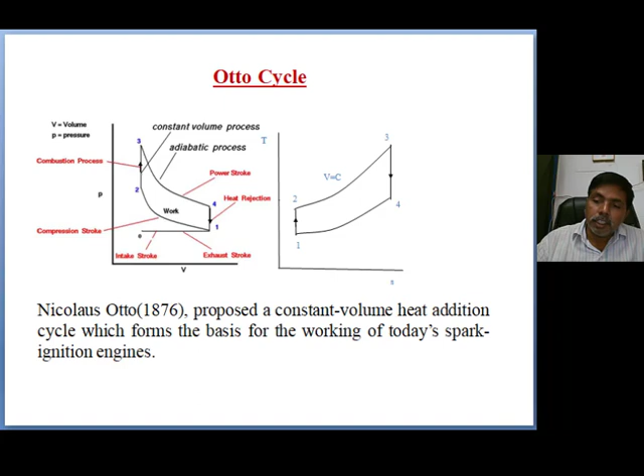Then this one is rectified by Diesel, a scientist. He proposed that instead of air fuel suction inside the cylinder, first we will suck intake the air inside the cylinder, then we will do the compression. Whatever ratio is required, you can do compression.

Why? Because fuel is not available, and at constant pressure process we will inject the fuel. This means in the cycle, what we call, we will add the heat. So here fuel and air we are compressing separately. In Otto cycle, air fuel mixture is entering inside the cylinder and we are doing compression together.

Due to the self-ignition temperature of the fuel constraint, we can't increase compression ratio beyond 8, 9, maximum 10 in Otto cycle. But if we separate fuel and air, compressing separately, then we can achieve more compression ratio.

And in this diesel cycle, heat addition takes place by constant pressure process, not volume process. The basic difference between Otto cycle and diesel cycle: first, in diesel cycle only air intakes to the cylinder, later we spray the fuel. Second, here heat addition is by constant pressure process, not constant volume process.

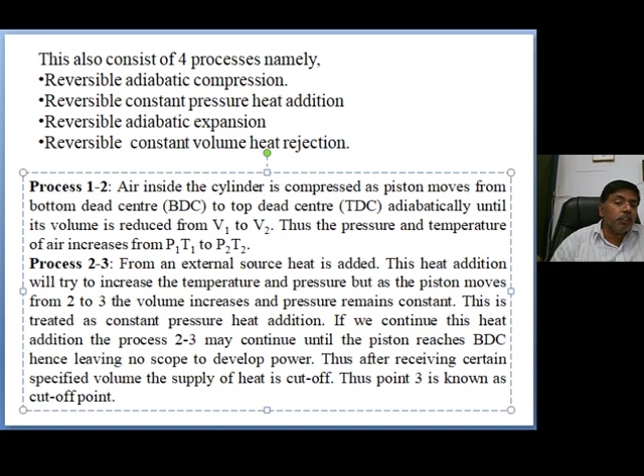Process 1 to 2, what is it taking? Air inside the cylinder is compressed as the piston moves from bottom dead center to top dead center adiabatically until it reaches volume 1 to volume 2. Then process 2, from an external source we are adding heat. This heat addition will try to increase the temperature and pressure, but the piston moves from 2 to 3. By the heat addition, pressure and temperature will increase, but here what we are doing is keeping pressure constant, so we are changing the volume. That's why pressure remains constant.

If we continue this heat addition 2 to 3 until it reaches BDC, it will not produce any power. So after reaching a certain specific volume, we will cut off the heat supply. That point is called the cutoff point. That ratio is the cutoff ratio, meaning volume after heat addition by volume before heat addition. It is greater than 1.

Next process, 3 to 4. What is the process? The air which has gained energy is expanded adiabatically to BDC, and it will develop power. 4 to 1, again same process: the cylinder is made to come in contact with a sink, causing rejection of heat instantaneously till the air reaches its initial state and completes the cycle.

So the explanation, whatever explanation I gave, I have provided in written form. It may be useful for you. I think it may be useful.

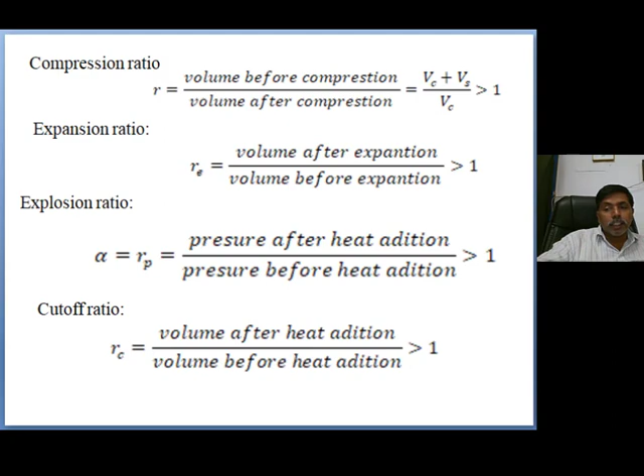What is this ratio? In the class starting itself I mentioned volume after heat addition by volume before heat addition is a cutoff ratio, so we write RC. So T3 equals RC into T2. T2 already we wrote, T2 equals T1 into R power gamma minus 1. You substitute that: RC into T1 into R power gamma minus 1. So T3 also we wrote in T1 form.

Next, T4, process 3 to 4. T4 by T3 equals, in adiabatic process, V3 by V4 whole power gamma minus 1. For simplification, this is the expansion ratio. I want to simplify this: V3 by V4, divided and multiplied by V2. Then we will get two ratios, V3 by V2 and V2 by V4.

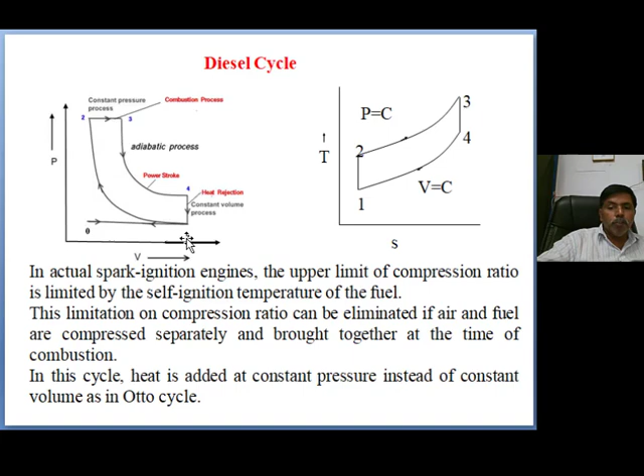Here V4 equals V1. Why? Because it is constant volume heat rejection, so V4 equals V1. In the constant volume heat rejection, V4 always equals V1. So V2 by V1, V2 by V1 means V1 by V2 is... I'm sorry, not gamma, V1 by V2 equals R, the compression ratio.

V2 by V1 is 1 by R. V3 by V2, volume after heat addition by volume before heat addition, is the cutoff ratio. So cutoff ratio divided by compression ratio, whole power gamma minus 1, gives T4 by T3. Here V4 equals V1.

Then T4 equals T3 into RC, cutoff ratio divided by compression ratio, whole power gamma minus 1. Then you substitute the T3 value: T1 into R power gamma minus 1 into RC, cutoff ratio into RC cutoff ratio divided by compression ratio, whole power gamma minus 1.

So R power gamma minus 1 divided by R power gamma minus 1, both will cancel. RC power 1 and RC power gamma minus 1, then minus 1 and plus 1 will cancel. Finally the equation you get is T1 into RC power gamma, so cutoff ratio power gamma. So T4 also we converted into T1 form.

So what we did is write all temperatures in T1 form for simplification of the equation. Next we substitute: 1 minus 1 by gamma into T1 into RC power gamma minus T1, divided by T1 into R power gamma minus 1 RC minus T1 into R power gamma minus 1. Here T1 in numerator and denominator we can cancel. Then the final equation we get is 1 minus 1 by gamma into RC power gamma minus 1, divided by R power gamma minus 1 into RC minus R power gamma minus 1.

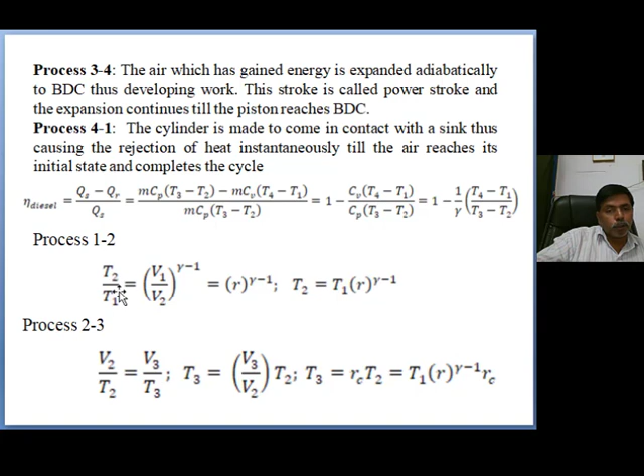Here in the temperatures, we converted and brought everything into a single temperature form by using process relations — adiabatic process and constant pressure process. Then we substituted, and finally derived the equation for maximum efficiency of an air standard diesel cycle: 1 minus 1 by R power gamma minus 1, into RC power gamma minus 1, divided by gamma into RC minus 1. So efficiency of diesel cycle depends upon the compression ratio and cutoff ratio.

What is cutoff ratio? It relates to heat addition — volume after heat addition by volume before heat addition. This is an important driving force for the diesel engine. For achievement of maximum work output, an optimum cutoff ratio is required. Determination of cutoff ratio is the first design parameter for the diesel cycle.

Okay, now we will solve some problems.

So it is clear now — I think the difference between Carnot, Otto and diesel cycle is somewhat clear. Carnot cycle: heat addition and heat rejection are isothermal processes. Otto cycle: heat addition and heat rejection are constant volume processes. Diesel cycle: heat addition is a constant pressure process, heat rejection is a constant volume process.

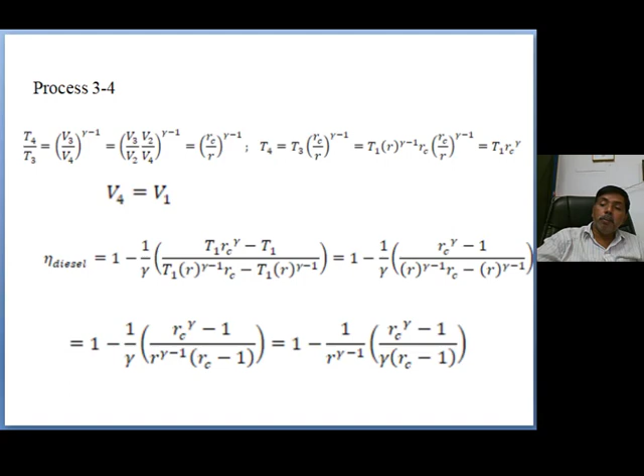Okay, so we will solve some problems, and then we will get a good idea about these efficiencies. I think we will solve 4 or 5 models. The first model...

A diesel engine works on the diesel cycle with a compression ratio of 15 and cutoff ratio of 1.75. So in this problem, they give the compression ratio and the cutoff ratio, and ask to calculate the air standard efficiency. Gamma 1.4, they also give gamma.

So the problem is clear, a direct question. Only one thing you have to recall is the maximum efficiency equation, that's all. The equation is 1 minus 1 by R power gamma minus 1, into RC cutoff ratio power gamma minus 1, divided by gamma into RC minus 1.

Simple. So first write down the given data. What is compression ratio? Next, what is cutoff ratio?

Compression ratio is 15. In Otto cycle problems, compression ratio max varies 5 to 7. But in diesel cycle, first problem it is 15, meaning double the compression ratio. That's why diesel cycle gets more compression ratio, meaning more power output we can achieve. That's why all transport vehicles and hill station vehicles majorly use diesel cycle.

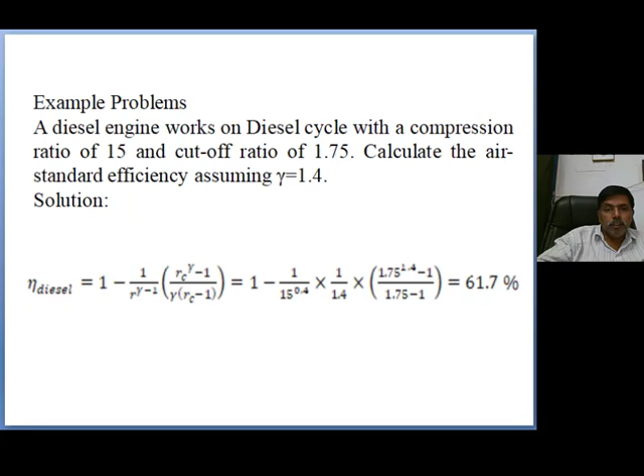Next problem. Here, a diesel engine is working with a compression ratio of 15. Compression ratio is given, same as old problem. Here they are not providing cutoff ratio, instead they provided expansion ratio. What is expansion ratio? This is 3 to 4.

After heat addition, whatever expansion is taking place, the piston moves from TDC to BDC, top dead center to bottom dead center, but already the piston has moved some distance, so 3 to 4. This is called expansion ratio.

In this problem they gave compression ratio and expansion ratio. Expansion ratio is 10. Calculate the air standard efficiency. Assume gamma equal to 1.4. Solve this problem.

I think we will get a clear idea. The efficiency equation is the same, it's not changing. But first you want to determine that in diesel cycle efficiency contains compression ratio, cutoff ratio, specific heat. Specific heat ratio is already given as 1.4. Even if not provided, it is 1.4, because these are air standard cycles.

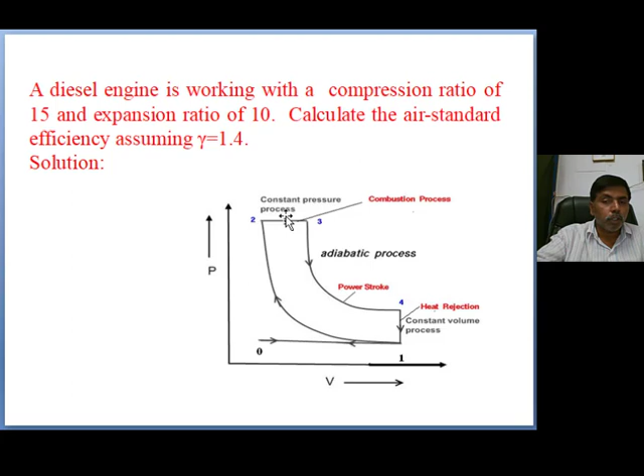You see, compression ratio equal to cutoff ratio into expansion ratio. Compression ratio is always higher than the cutoff ratio and expansion ratio individually. Now I want to determine cutoff ratio: RC equal to R by expansion ratio. 15 by 10, we got 1.5.

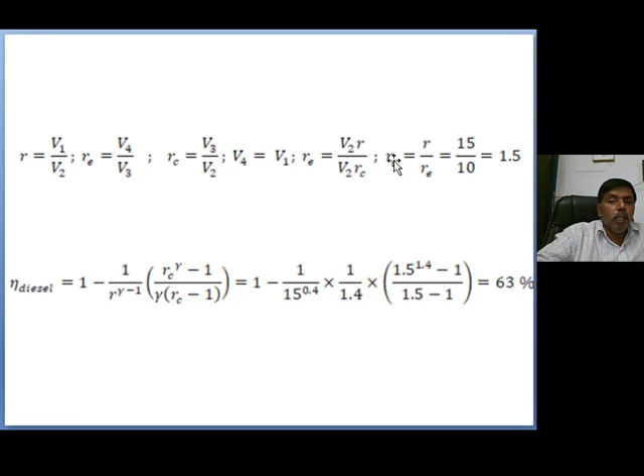By solving this problem, we got one shortcut for competition examinations, especially GATE. Wherever expansion ratio is given, we can determine the compression ratio, or if cutoff ratio and expansion ratio are given, we can determine the compression ratio. Compression ratio equals cutoff ratio into expansion ratio. Then the efficiency of diesel cycle equals 1 minus 1 by R power gamma minus 1, into RC power gamma minus 1, divided by gamma into RC minus 1. Substituting, you will get the standard efficiency of the cycle.

So by solving this problem, we got one logic for competition examinations: compression ratio equals cutoff ratio into expansion ratio. Okay, very good. Next, we'll solve the next problem.

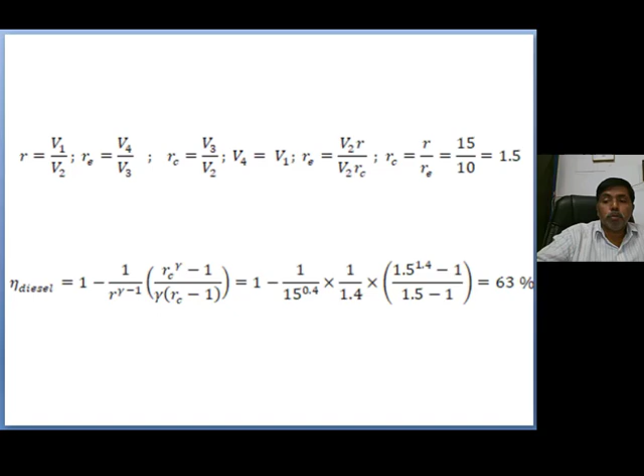Yes, we'll solve the next problem. Move to the next problem. Here, a diesel engine has a compression ratio of 20.

Diesel engine has a compression ratio of 20, and cutoff takes place — they haven't given the ratio directly, but a logic for the cutoff ratio. Cutoff takes place at 5% of stroke. Find the air standard efficiency, assuming gamma equals 1.4. See the problem, third model.

Here, a diesel engine has a compression ratio of 20, and cutoff takes place at 5% of the stroke. What is stroke? 5% of the stroke — cutoff takes place at 5% of stroke. Then find the air standard efficiency. This is one of the important questions in competition examinations.

How are we calculating it? First I will show the theoretical method, and later I will give a shortcut too. In air standard cycles, these are the types of problems you'll get in competition examinations — 2 mark questions. So first, every time, draw the schematic diagram.

That is first principle. Next, write down the given data. Here, compression ratio is 20. What is compression ratio? R, compression ratio, R equals V1 by V2 — volume before compression by volume after compression — equals 20. Then V1 equals 20 V2. That's all, so V1 equals 20 V2.

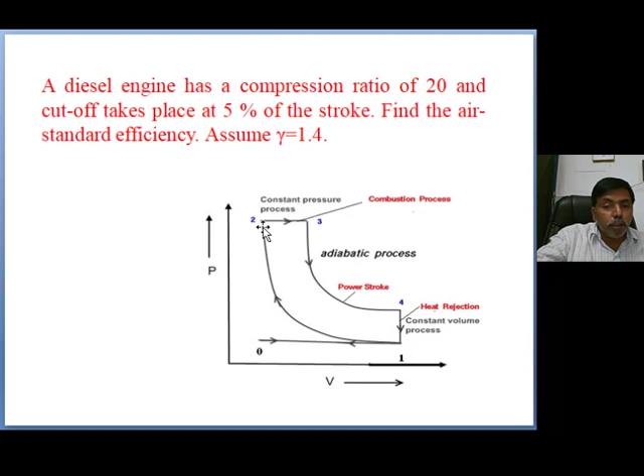Here V3 minus V2, in the problem, is given as 5% of stroke. Once again read the problem: cutoff takes place at 5% of stroke means V3 minus V2 is the cutoff. Just after compression we are adding heat, the piston is moving, volume change is taking place. Where we stop the heat addition, then cutoff takes place.

Then V3 minus V2 equals 5% of stroke. We already calculated stroke volume as 19 V2. So 5 divided by 100 into 19 V2 means 0.95 V2. Then V3 equals 1.95 V2. Then what is cutoff ratio? Volume after heat addition by volume before heat addition — volume after heat addition is 1.95 V2, divided by volume before heat addition, V2. V2 cancels, so cutoff ratio is 1.95.

This is a cutoff ratio of 1.95. That's all. Once you calculate the cutoff ratio, you can calculate the efficiency of the diesel cycle: 1 minus 1 by R power gamma minus 1, into RC power gamma minus 1, by gamma into RC minus 1. You can substitute and get the value. This is one of the logical questions.

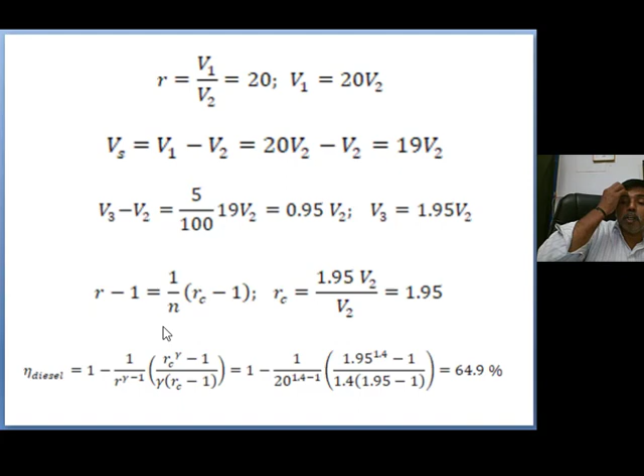Now two shortcut equations I mentioned. Compression ratio equal to cutoff ratio into expansion ratio. Second equation: if 1 by nth of the stroke cutoff is taking place, they give R minus 1 equal to 1 by n into RC minus 1. Directly you can determine the cutoff. But this equation you can use for competitive examination, not always. In general method you have to solve the problem. In competitive examination you can use the shortcut method.

Then efficiency of diesel cycle: 1 minus 1 by R power gamma minus 1 into RC power gamma minus 1 divided by RC minus 1, that equal to 1 minus 1 by 20. Some calculation, anyone calculated? Please calculate. What is the value you got? Yes, anyone? Anyone? Okay. 64.9, around 65 percentage you will get.

Next problem: determine the ideal efficiency of diesel engine. Here next method, I am solving each method one problem only. Remaining you can practice at home. If you got any doubts, yes, I am ready to solve. Next online class, I will solve the problem.

Determine the ideal efficiency of diesel engine having cylinder with bore. Here dimensions they provided: bore 250 mm, stroke 375 mm, and clearance volume of 1500 cc. And clearance volume of 1500 cc cubic centimeters with fuel cutoff occurring at 5% of stroke. Assume gamma equal to 1.4 for air.

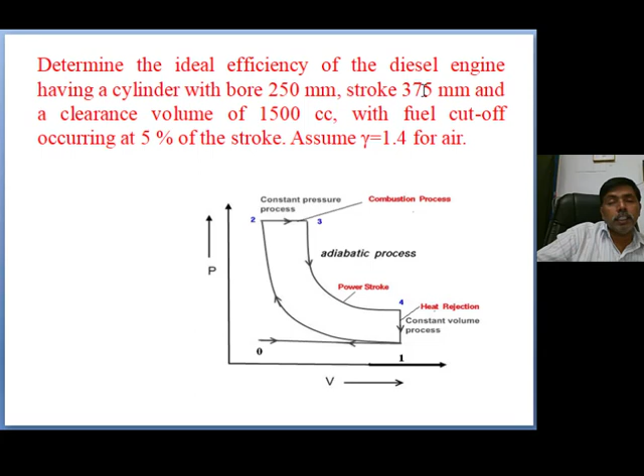Why? Because clearance volume is in cubic centimeters, you can see. Same, this is the Vs, clearance volume. It's not the swept volume. Swept volume is 18,407 cubic centimeter. Clearance volume already given 1500, I think, 1500 cubic centimeter. You see, 1500 cubic centimeter is the clearance volume. Then what is the compression ratio?

13.27. Clearance volume plus swept volume by clearance volume, clearance volume can cancel, 1 plus swept volume by clearance volume. You will get 13.27, is the compression ratio. Again same method, swept volume equal to V1 minus V2. Same compression ratio you know. Then cutoff occurs 5% of stroke, V3 minus V2, 5% of stroke cutoff is occurring. Then you solve the problem.

Or shortcut method: then cutoff ratio equal to volume after heat addition, V3 divided by V2. V3 is 1.6135 V2 by V2, then you will get the cutoff ratio. Or what is the shortcut method? R minus 1 equal to 1 by nth of Rc minus 1. First you determine the compression ratio by using the dimensions.

Swept volume is pi by 4 d square L, and clearance volume is given. Clearance volume plus swept volume by clearance volume gives compression ratio. Using 1 minus 1 by n of 5 percentage, 1 by 0.05 into RC minus 1, you will get the cutoff ratio as 1.6.

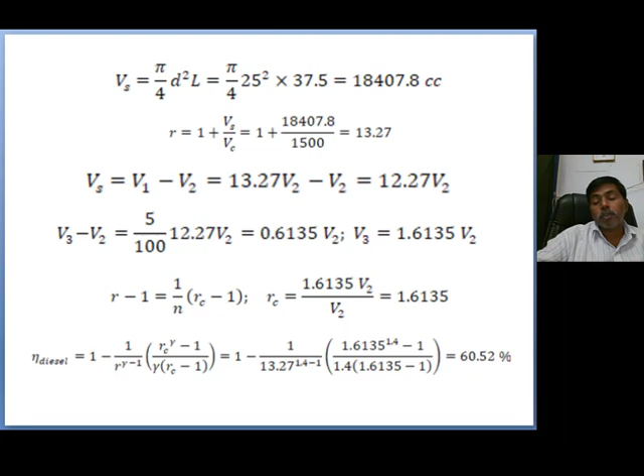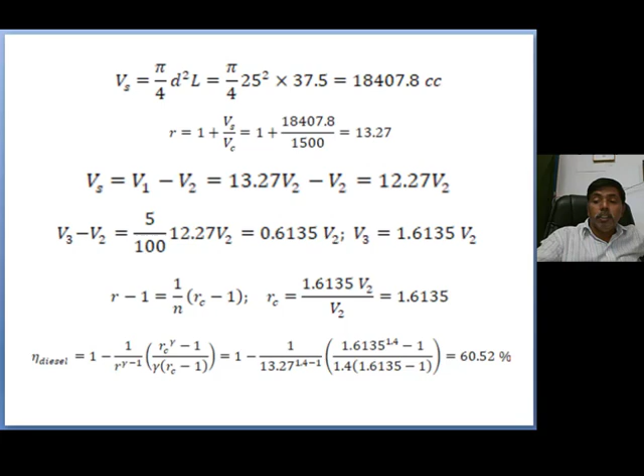What is the value you got? Final efficiency? You want to do it fast? What is the answer? Around 60 to 61 percentage, you will get. Yeah, 60.5. Okay, we'll solve the last problem now.

This is the last one. An engine working on diesel cycle, the ratio of the weights of air and fuel supplied is 50 is to 1. In an engine working on diesel cycle, the air fuel ratio is given as 50 is to 1.

First, the given data is the air fuel ratio. Then next, the temperature of air at the beginning of the compression. You can see T1 is 60 degrees, convert into Kelvin scale plus 273, means 333 Kelvin.

And the compression ratio used is 14 is to 1. So compression ratio R is 14. Then what is the ideal efficiency of the engine? Here they are asked to determine the efficiency only.

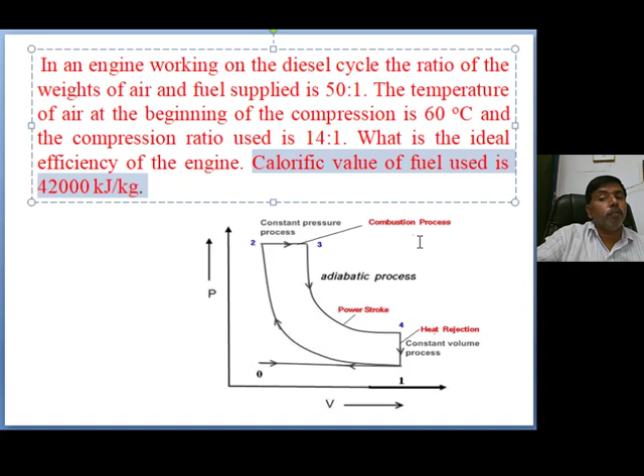Calorific value of the fuel used is 42,000 kilojoules. So calorific value of the fuel is given, and compression ratio and initial temperature are given. Now we want to determine the remaining properties for determination of the efficiency.

So what we want to determine here - compression ratio already given is 14 is to 1, but they have not given cutoff ratio. So in this problem, what is missing is the cutoff ratio. We want to determine the cutoff ratio.

For determination of the cutoff ratio, the heat input is given. By using heat input, T3 minus T2, we can determine T3 and T2 values. Then you can determine the cutoff ratio, because it is a constant pressure process.

T3 by T2 equal to V3 by V2. Automatically T3, T2 you know. V3 by V2 you can determine cutoff ratio. Once you know the cutoff ratio and the compression ratio, then you can determine the efficiency. For that, let's see what we did.

CP values you have to assume, gamma value you have to assume. I already mentioned this is an air standard cycle. Gamma is 1.4, CV specific constant volume is 0.717 kilojoules per kg Kelvin, CP is 1.004 kilojoules per kg Kelvin.

From process 1 to 2, first you determine T2, adiabatic compression. T2 by T1 equal to V1 by V2 whole power gamma minus 1. V1 by V2 means R power gamma minus 1. Then T2 equals 957.04 Kelvin.

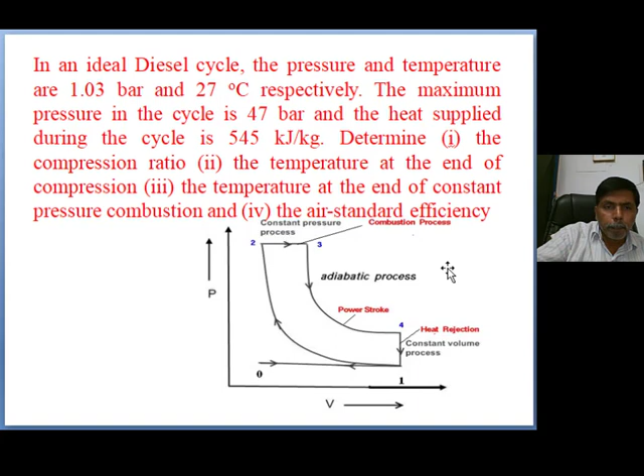How is the heat supply given? They gave fuel air ratio and calorific value. What is the fuel air ratio? It is 50 is to 1.

50 is to 1 into calorific value divided by Cp, then T3 minus T2 you will get 836. Then T3, the temperature after heat addition, is 1793 Kelvin.

Then cutoff ratio RC equal to V3 by V2, then T3 by T2. Then cutoff ratio V3 by V2 you can get as 1.874.

So in this problem what we did - first we determine T2 value, next we determine T3 value, then constant pressure process relations we use, V3 by V2 equal to T3 by T2 because pressure is constant. V3 by V2 is the cutoff ratio, then automatically we determine the cutoff ratio as 1.874.

Then efficiency of diesel cycle, same formula we substituted. What is the efficiency you got? Anyone can calculate? With this, how much we got? 60%. Okay, with this, we are stopping today's lecture.

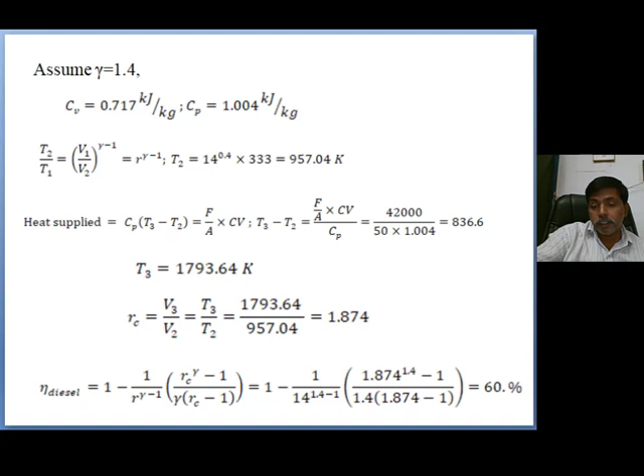Next class we will continue. One more problem is there, then after that we will discuss comparison of Otto cycle and diesel cycle. Yes, 60%. Thank you, thank you, thank you very much.